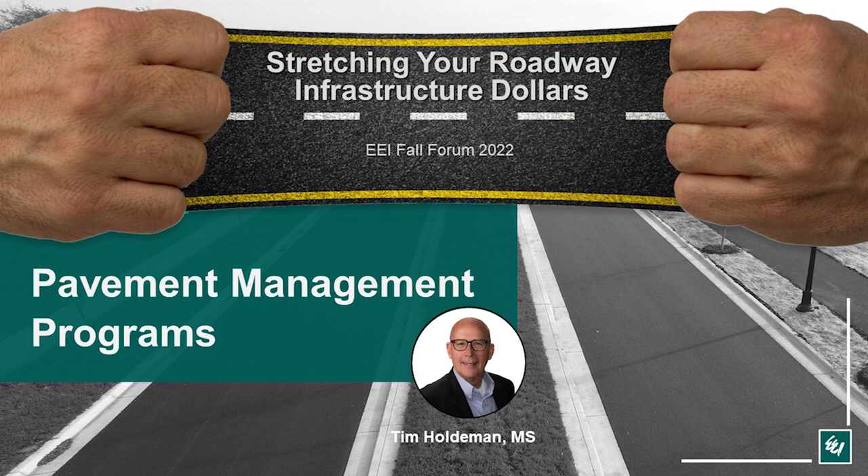I'm going to be talking about pavement management programs and how they can be the centerpiece of your strategy for stretching your infrastructure dollars. We'll start with a general discussion about why pavement management programs are important, then get into the technical aspects of pavement condition. We'll also talk about pavement maintenance, its importance, and its role in extending the life cycle of your pavement. Then we'll add costs to that, and look at how we can optimize our roadway programs using pavement management.

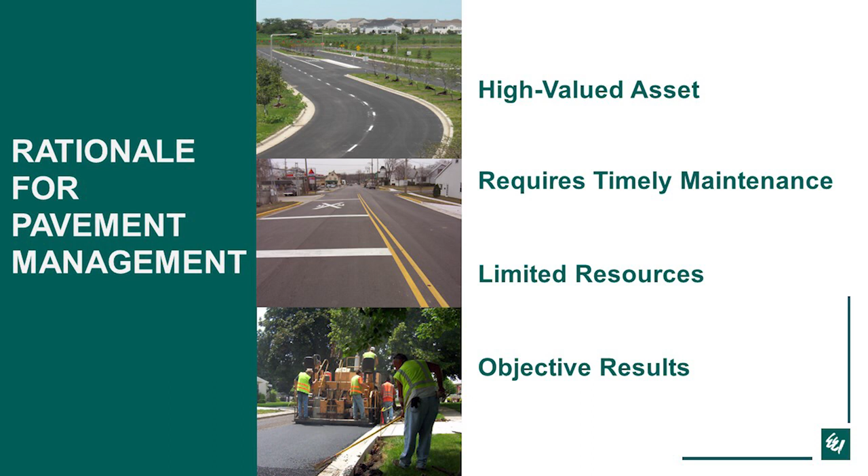So why are pavement management programs important? Well, first of all, we're looking at one of the highest valued assets that a community has when we're looking at the pavement. We're going to be talking today mostly about asphalt, but the same concepts apply to concrete. These assets require us to be active in maintaining them. We don't just put down an asphalt pavement and then go away from it for 20 years. There is maintenance that needs to be done.

With these two things in mind, we're looking at trying to optimize our limited resources. How can we extend the life cycle of our pavement by being proactive in our maintenance and being judicious in the economy of the dollars that we're spending?

The other thing that's nice about pavement management programs is that they provide an objective result. Many communities in our region are using this on an annual basis to support their roadway programs. In fact, the boards and councils have become routinely aware of them, and they know that this is part of the annual routine. So they expect to see the pavement management program as part of the rationale for this year's annual program.

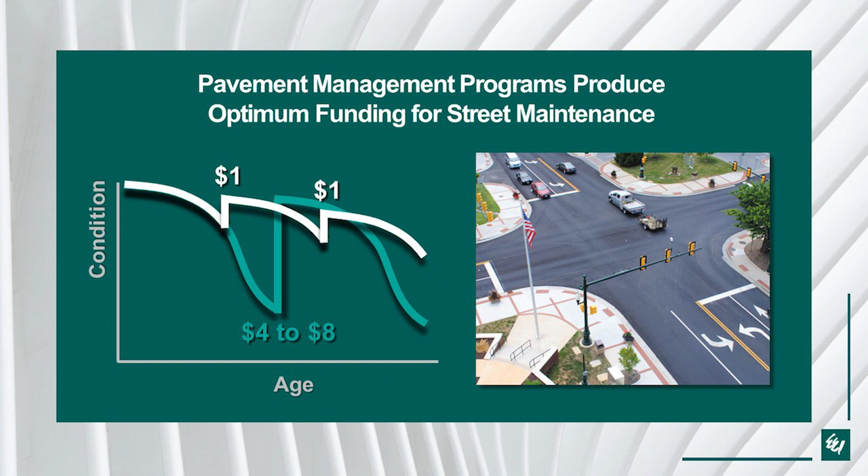The idea is that preventative maintenance can be done incrementally to extend the life expectancy at much lower life cycle costs, shown with the white curve there. So we're going to explore this in terms of how we can measure the condition, what types of programs we use to extend the life cycle, and then how we can optimize that.

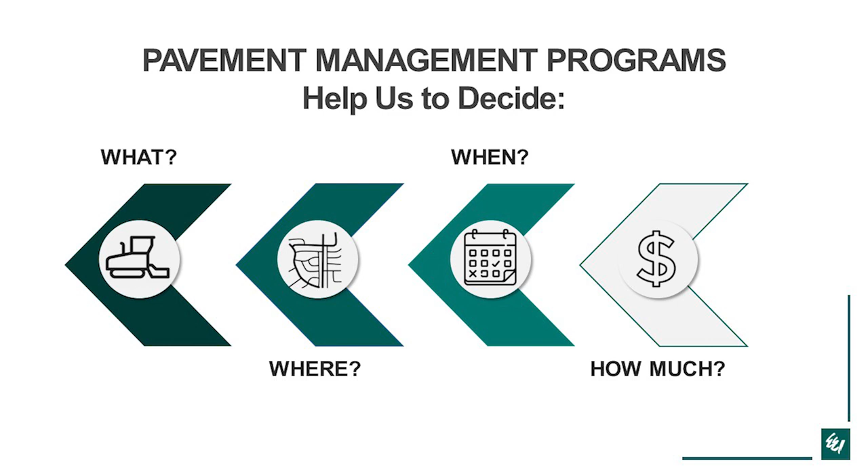So pavement management programs help us decide what to do, where to do it, when to do it, and how much it's going to cost. That's kind of a forward viewpoint of the process—what are we going to do, where, and when? And then, based on that, how much is it going to cost?

One of the advantages of pavement management programs is that through the software applications, we can actually do the reverse. We can decide how much we want to spend, and then the programs will tell us what, where, and when we should spend that. That's part of the power of this—being able to run different scenarios using the software programs.

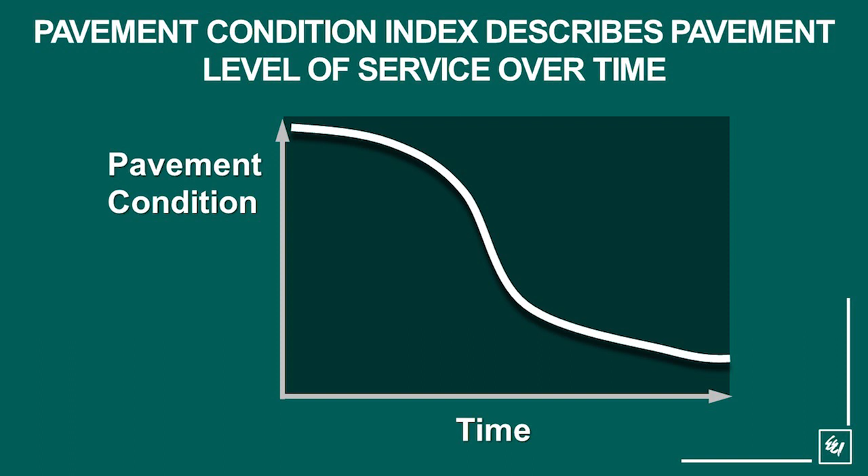The pavement condition index describes the level of service over time. On this graph, we see a simple line representing pavement condition over time. In the upper left of the graph, the pavement, when it's first put down, is at a very high level of service. Then over time it deteriorates, and there's a break point where it breaks off and really declines. That break point is very important to us. Being able to measure pavement condition over time is the fundamental idea in a pavement management program.

Measuring pavement condition is not new—it's been done for a long time. In fact, there's an ASTM standard, and in times past, and maybe even today in some communities, there are engineering techs who know how to do these surveys. They go out and look at a representative plot or patch of the roadway and fill out the form. You can imagine how much time that would take for a community with 30, 50, 100 miles of roadway. So this is kind of the old style.

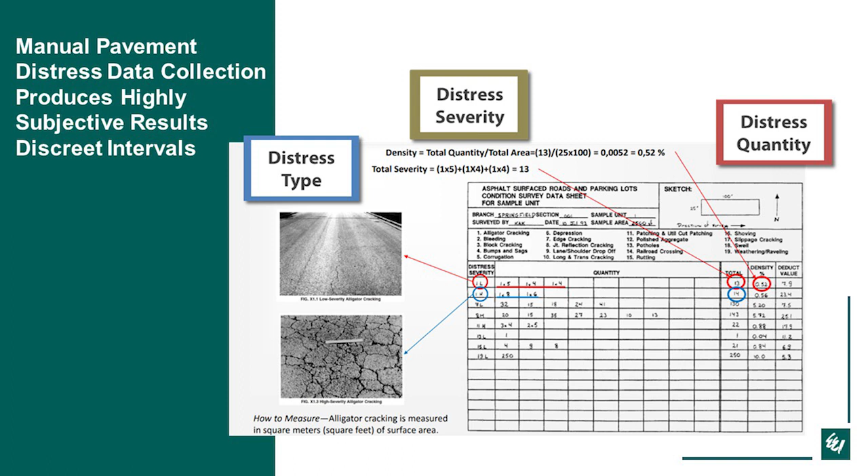It was pretty subjective, and it takes a lot of time, and it's only incremental. It's only done over certain representative areas.

Today's technology uses lasers, GPS, and video to get a continuous record of the surface condition. And there are deflectometers which can measure how the asphalt responds to an impact, giving you an idea of the condition of the base and the sub-base. So we can identify the surface condition and the subsurface condition.

In most instances, we talk about the surface or overall, and overall is surface and subsurface. So that's important to recognize when you're looking at a pavement condition index map: is this map surface only, or is it overall, which includes the subsurface?

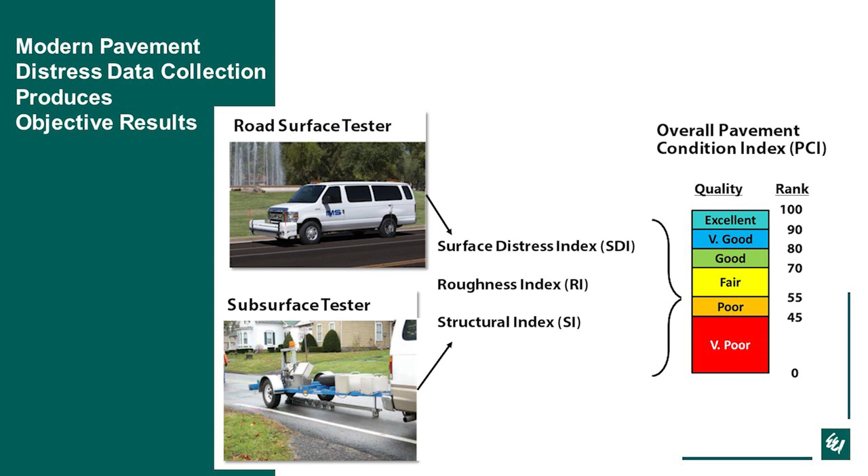The data acquired is then processed, and each block in the survey is assigned a pavement condition. You see on the right the quantitative rank from 0 to 100, and then qualitatively from very poor to excellent. We always use these same colors, and they carry through, so you'll see them on maps and other displays.

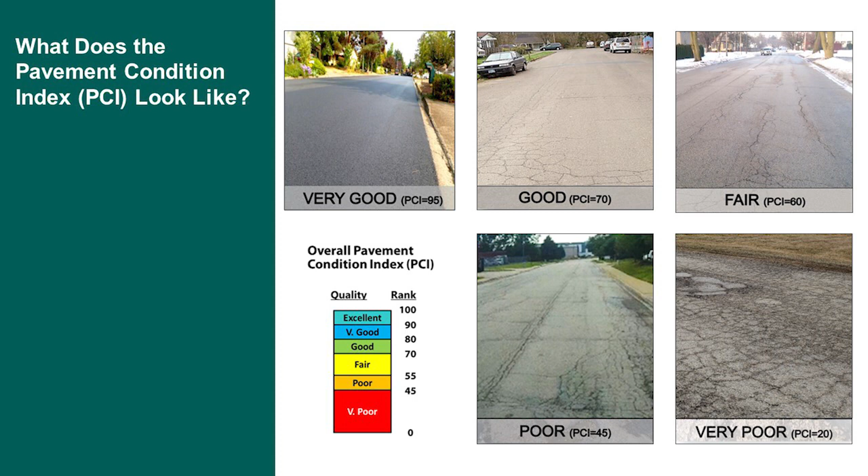In most instances, that fair condition is about the cutoff for where we want to start looking at perhaps resurfacing. We don't want to let it get into the very poor condition, because that's allowing moisture into the base, which creates a problem that even resurfacing won't address.

So this is an example of a pavement condition index for a town, a village. It's Elk Grove Village, and you can see the different streets shown in color, with the scale shown. There's also a pie chart showing the percentage of roadway that is excellent, good, fair, and so on. Notice the average surface condition is 75.8.

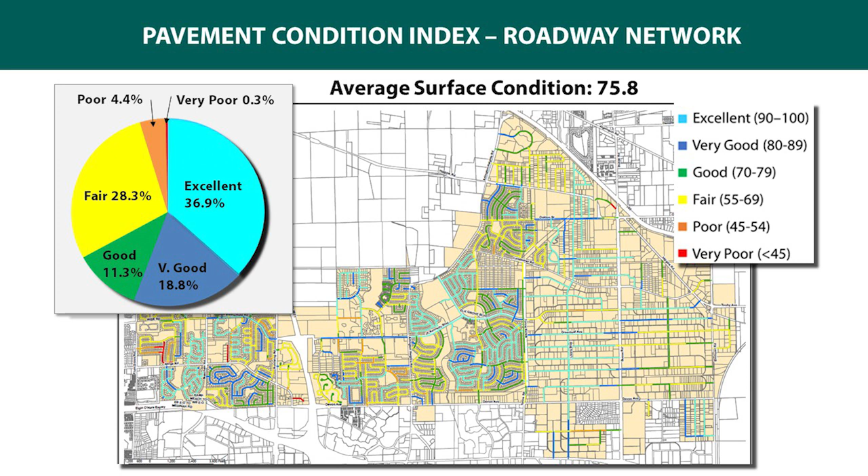Usually in these, we look at that average number and how it varies over time as we run through various future scenarios. So this is a snapshot in time, showing current conditions, and it is just the surface condition.

So how much does all that cost? Well, it depends, and there's quite a range in terms of cost per mile, $200 to $1,200. That's quite a variation. So what are the variables?

One of the most important variables is the miles of the survey. There's a very high mobilization charge, so if you only have 40 or 50 miles, your cost per mile is going to be relatively high, probably near the top of this range.

If you've got 700 to 800 miles, up to 1,000, you can expect to have a much lower cost.

Then it's a matter of what technology is being used. There's actually smartphone technology today where you can put a smartphone in your dashboard and have a continuous record, and they have algorithms that will interpret the cracking in the roadway.

The type of data collected matters too, whether it's surface only or also includes subsurface information, and whether you're going to include some of your other infrastructure. Because there are cameras, you can have those pointed to your right-of-way and pick up trees or signs, and they have artificial intelligence algorithms that can identify these signs.

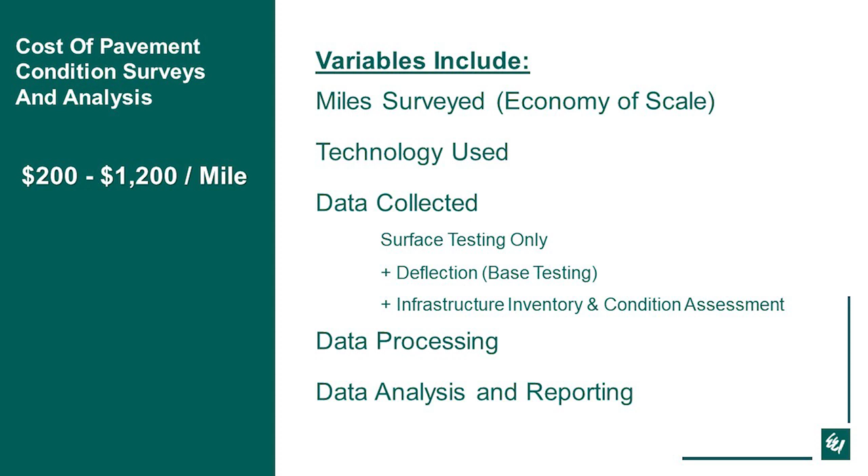And then, of course, there's the processing, data analysis, and reporting. Many times you'll hire a contractor based on a bid and then use that data, either in-house or with your engineering firm, to interpret it and help develop your 5- and 10-year capital improvement programs.

One thing that can be done with that first snapshot: if you have the date the surface was last resurfaced, you can plot the age versus the PCI for that first condition survey, and you'll see a community-wide deterioration curve.

Now, it's kind of subjective at this point, and it's broad throughout the whole community, so the points are kind of all around, but it will give you a good idea on average of how things are deteriorating.

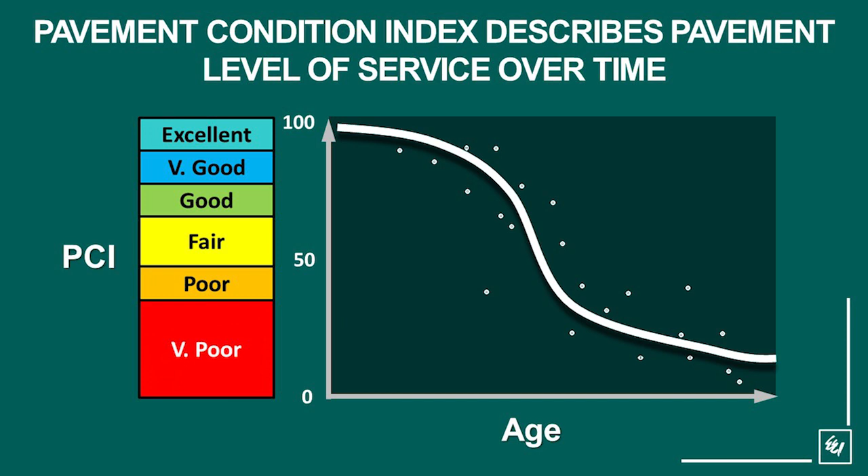The best case is when you've done several surveys and have results on a block of roadway that you can plot over time, typically in 3 to 5 year increments. You can imagine if you could see a new pavement surface and how it deteriorated over time, that would be very beneficial for predicting when maintenance or resurfacing would be needed.

Timely maintenance helps extend the useful life of our pavement. As I mentioned, that normal degradation curve—resurfacing and then going back to degradation with no pavement maintenance—is shown by that curve. What we would hope to accomplish is to intervene in that deterioration before we reach that break point, keep our pavement condition up, and extend the overall life cycle. So how would we do that?

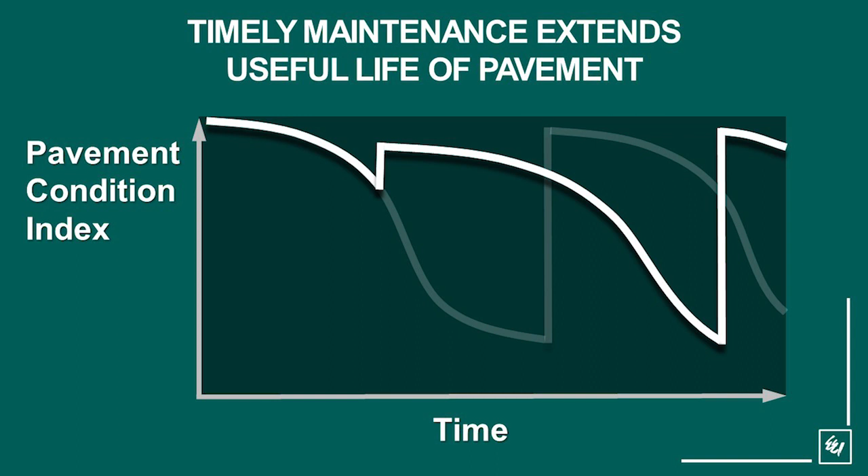Well, we would do that through preventative maintenance programs, such as asphalt rejuvenators or microsurfacing. Those things would be preventative maintenance in nature, done when the PCI is up pretty high. If the PCI was allowed to drop down, we would go into a rehabilitation phase where resurfacing or hot mix in place would be applicable.

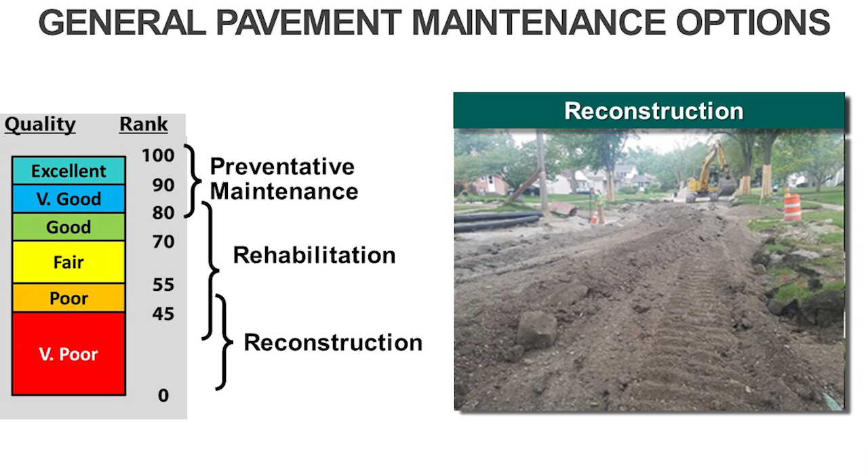Chris will be talking about these different maintenance options in more detail in the coming presentation, but just to give you an idea—lastly, if we've allowed the pavement to deteriorate so that the subsurface needs to be reconstructed, we're talking about a significant amount of money. So that's the pavement maintenance options we're looking at.

Let's take a look at what that does to a deterioration curve. This is a normal deterioration curve showing number of years and PCI rank—it's kind of scrunched together here so it's a little steeper, but you see less slope at the beginning and then it breaks off. If we apply certain pavement maintenance activities like resurfacing or heavy patching along with resurfacing—going in and doing heavy patching before we resurface—that's actually going to move that deterioration curve a little to the right and flatten it, because that heavy patching keeps it from deteriorating so much in the years out.

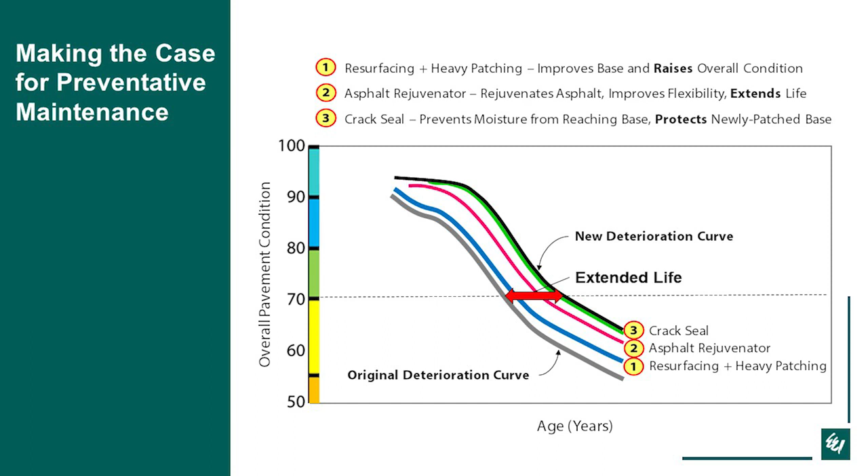The second curve here is shown with the asphalt rejuvenator. So if we add asphalt rejuvenator, in those early years it stays better longer, and the curve gets moved out a little, staying a little higher at the top. The last part is the crack seal, and of course crack sealing helps prevent moisture from getting down into the pavement. So applying these pavement maintenance activities throughout the life cycle creates a new deterioration curve that represents an extension of the life cycle.

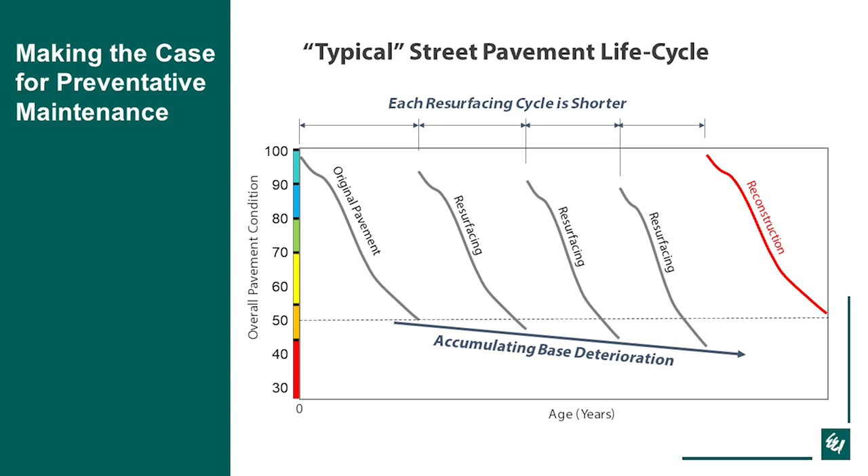The cycles in which we have to come back and resurface are closer together—fewer years apart—so the pavement surface itself doesn't stay up at a high level of service for long, and eventually we have to reconstruct.

If we look at this with pavement maintenance in mind, we see the original pavement along with the resurfacing there, but now our new deterioration curve stays higher—up at a higher level of service longer—and doesn't go as deep. So yes, eventually we'll have to reconstruct, but through the life cycle that pavement has had a higher level of service for longer, and the base has not deteriorated as much over time. That's the argument for pavement maintenance.

From this example, we're saving about 20 to 25% over the life cycle of that pavement.

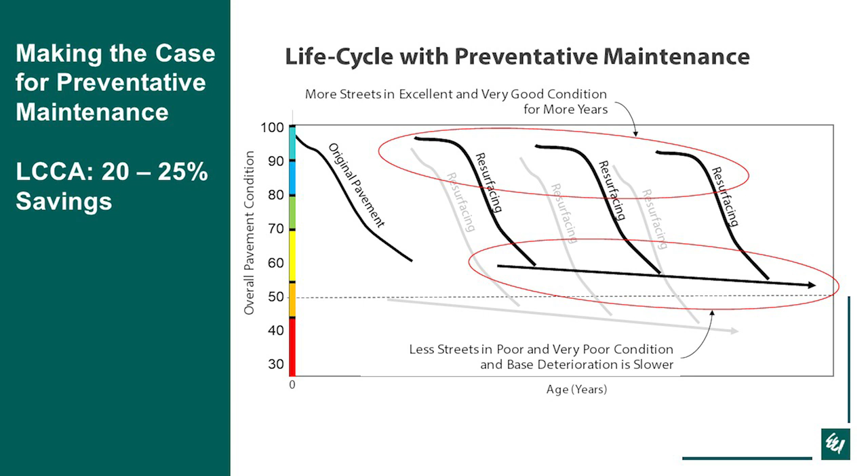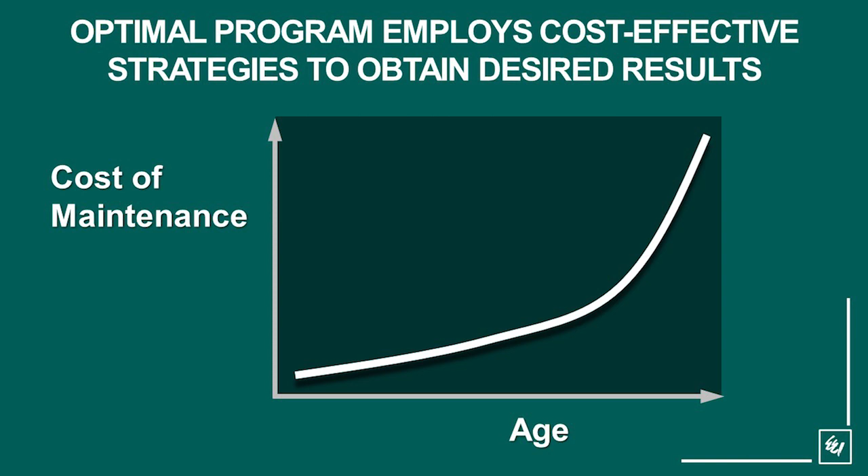So we've talked about measuring pavement deterioration and ways to extend the life cycle. Let's add costs now. What we see is that the cost of maintenance increases as the pavement gets older, and there's a break point when you have to resurface, and another break point where you have to reconstruct. When we look at the cost of these different maintenance activities over time and how they relate to PCI, we see this change in the investment that's needed.

In the case of preventative maintenance—asphalt rejuvenator, crack sealing, and microsurfacing—we're talking about $1 to $7 per square yard up at that high level of service. Moving into rehabilitation, primarily resurfacing, costs are much higher, and reconstruction or full depth reclamation is even higher still. It's this difference and increase in cost as PCI goes down, as the level of service is allowed to deteriorate, that is the rationale—the economics—behind doing pavement maintenance.

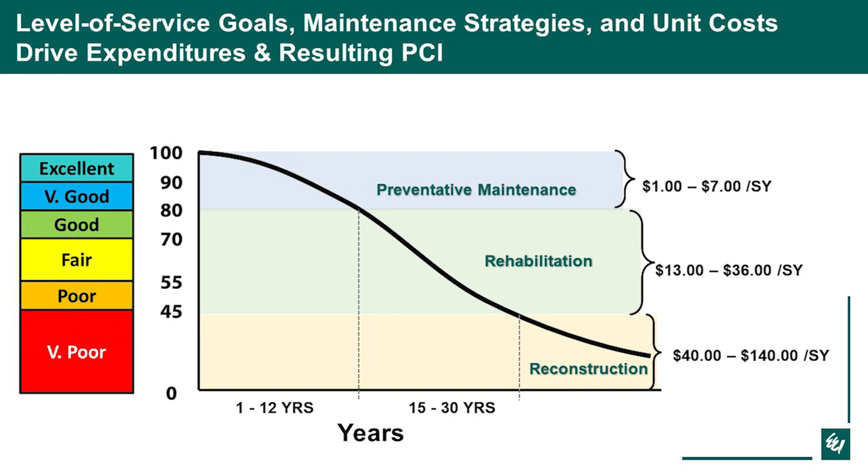In pavement management programs, it's important to first understand what your target is. Here is an example of a community that developed what they wanted their pavement to look like. Their actual was not anywhere near this, and it was going to take several years to accomplish, but this is where their end goal was, so that they had enough excellent and very good pavement to apply some pavement maintenance strategies, and not too many in very poor or poor condition needing reconstruction.

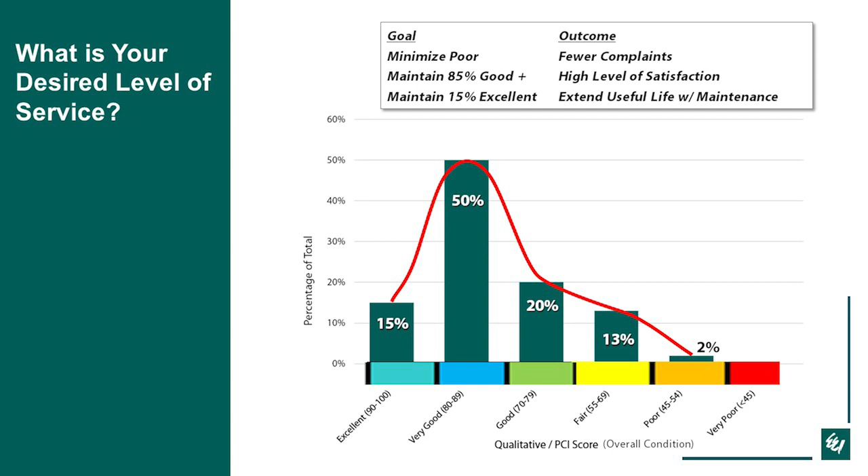But realizing that sometimes streets do get to that point where you need to reconstruct. So with this ideal distribution, they were able to establish what their goal was, and then do different permutations through the software to see how they could get to that goal.

Some of those permutations are exemplified by this decision tree, where the user, the community, decides at what level you would do what strategy. Chris will talk about this a little bit more, but for instance, if PCI was less than 85, we might look at a pavement maintenance activity. And if cracking was greater than 10, we might do that, including crack sealing. But if it was less than 10, we wouldn't do anything for that particular year.

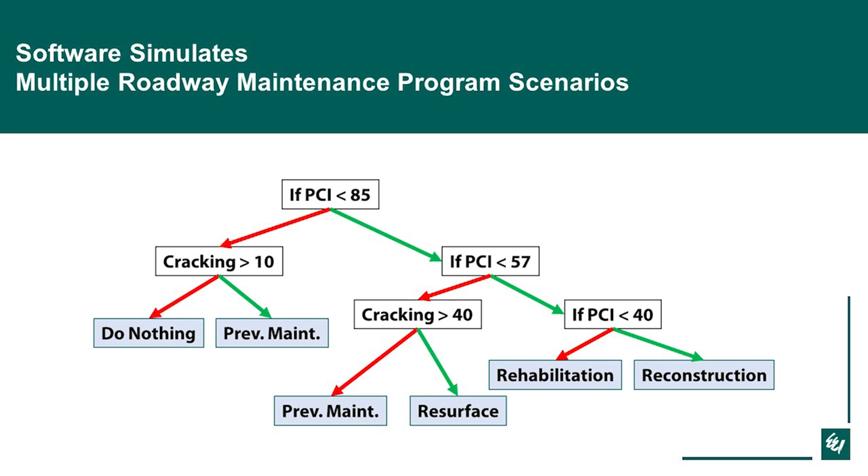The algorithms in the software go through these decision trees for every block, for every year, as you, the user, define the decision points. As a result, you get what the condition will be in the future. And then you can identify various goals and see how much it will cost to reach that goal. That's what's shown here.

In the end, it's all about putting that CIP program together, right? It's that 5-year program, and where are the streets that we're going to be resurfacing or maintaining over the next 5 and/or 10 years. This is an example of one of the communities we've worked with and their 5-year CIP for roads.

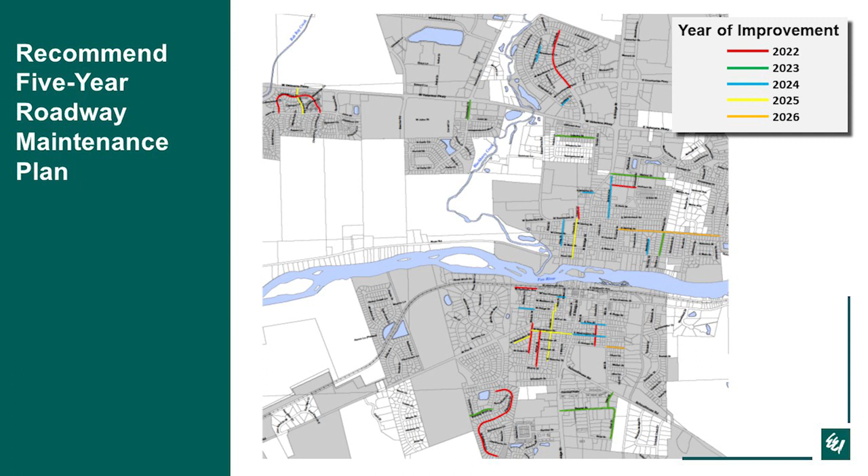What you don't see here is that this is a result of both the software saying what was needed to be done and the interpretation of the engineer and the client in determining what program they wanted to implement. So it's a combination. We don't just take what the computer says. We also look at that, particularly in terms of grouping streets together, because we know that when we have a number of streets located close together, we'll get a better unit cost. That's part of the strategy to stretch our roadway dollars.

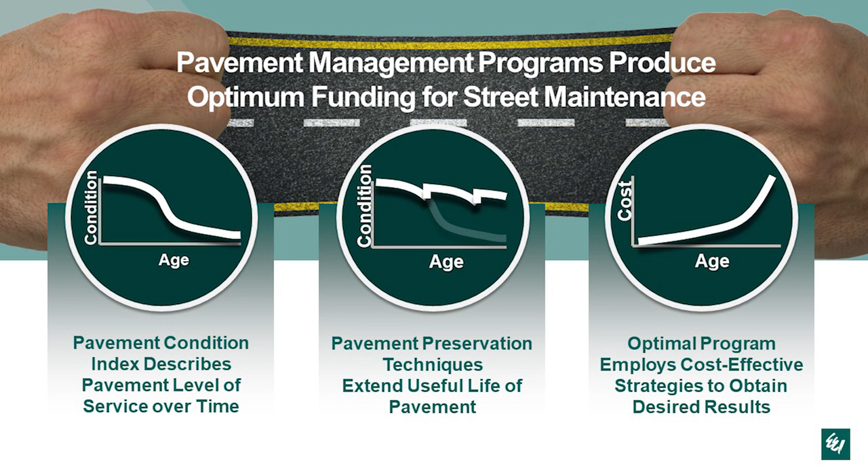So in summary, the pavement condition allows us to see how pavement deteriorates over time. We know that we can do some maintenance activities and extend that life cycle, and that we can do that in a timely basis that will actually save us money in the long run, optimizing and stretching our dollars that we're spending. So with that, I'd be happy to take any questions.

Yes, ma'am. Do you have any recommendations for programs that are easy to use? So are you referring to software programs?

So the question is, do we have any recommendations for software programs? And the answer is no. We have some that we are more familiar with than others, but over the last 5 years, there's been an upsurge in the number of vendors in the market. So our recommendation is that you go through a proposal process, shortlisting, maybe doing a statement of qualification, then shortlisting 3 and getting their proposals.

One thing to be careful about is QA/QC. We've seen some communities in this area that experienced less than high quality data. They know that because they have a street that had a higher pavement condition index 3 years after it was done the first time. That was an anomaly, but enough for them to raise an eyebrow and dig into the quality control behind that. The takeaway is there's an important role for quality control in implementation, but it's really through the RFQ, RFP process that you'll find the best program suited for your community. It's a great learning experience to go through that as well.

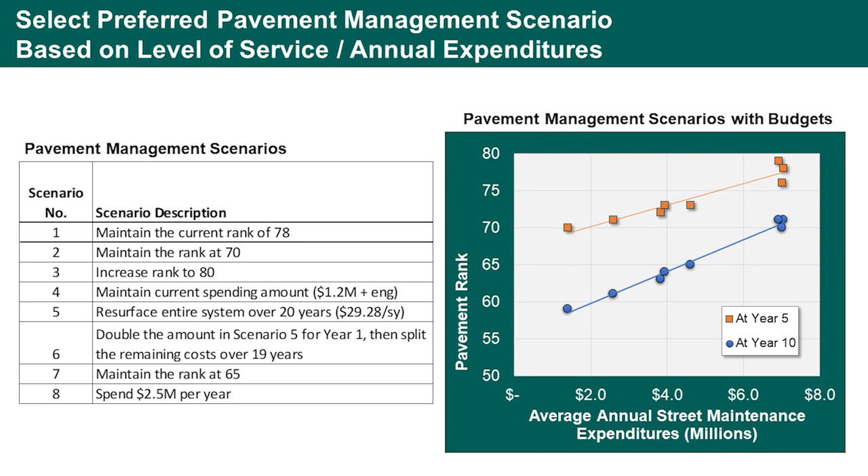So this is one point in time, 5 years out. The question was about the axis being money instead of time. Most of the graphs we were showing were about time, and this one shows the dollar spent, how we deteriorate over time. What we've done here is taken one vertical slice, at one time, 5 years past the present, and looked at the detail in terms of cost. That's why we have two curves - we've done that at 2 points, at 5 years and at 10 years, and this is how it changes.

So if you're taking a 5-year window for this, are you taking two fixed points to say this road went from 78 to 70, or how are you doing it? Yes, yes, so it's from current to 5 years out. And look at that - how much did we spend to get here, and what's the overall PCI? And then 10 years.

Very powerful - you can do all kinds of different permutations, and that decision tree can be modified. Chris is going to talk a little bit more about how that works in terms of how it relates back to the preventative maintenance program.

One more question - what program was used for these graphs? This particular program, we use Paver Pro, but we also use Paver, kind of the bare bones version. I know there are several other interfaces that are really kind of user preference. The data is pretty standardized now, but how it's displayed and the decision trees and all that stuff is software dependent. There's a lot of different software - some are very engineering specific, some are more intuitive. That's why going through that selection process is really valuable, because you get to see what the different screens look like, what you have to do, how many clicks you have to do, and so on. It's very valuable to go through that process.